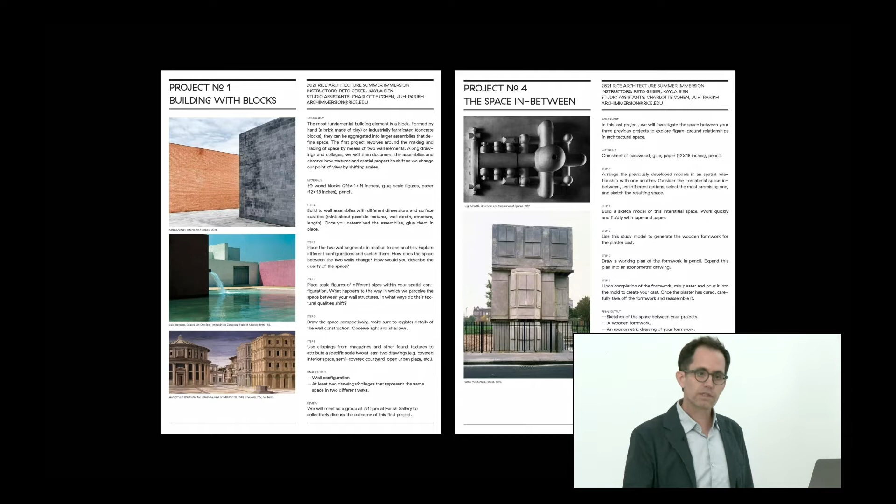The summer immersion is organized in a set of 4 assignments. We do one each day, and the last day we work on documentation. Each one is dedicated to one way of making space. There are clearly many more, but that's just a way in. The course takes place here in the school in an actual studio space, so the participants really get to experience what it means to be immersed in architecture school life.

They receive ample feedback, direct feedback, a lot of it directly from a group of our own students, grad and undergrad, who work as teaching assistants to provide important insight, not only on architecture, but also what it means to study architecture, what it means to apply to college. Important first-hand experience that comes directly from our students. And in return, I think this is also a valuable teaching opportunity for our students to get exposed to what it means to be on the other side in the classroom.

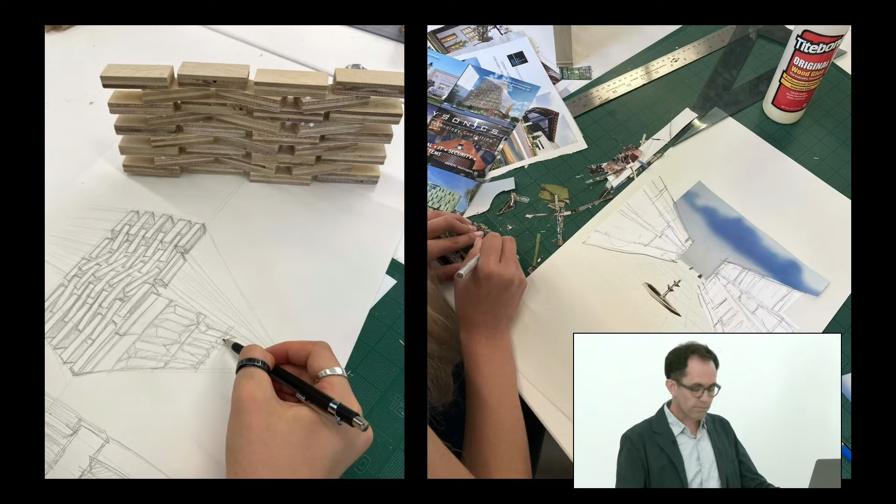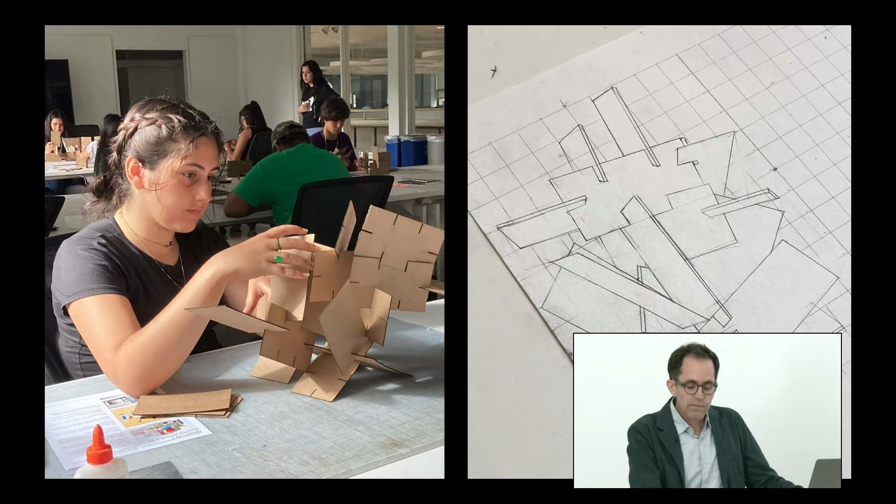We work with basic elements, building blocks that we aggregate into objects of various qualities set in relation, working with different scalar relationships. We work with plates and sticks. We explore different ways and means to create an envisioned space. As we move forward within these only 4 days, there's a progression of complexity. Many of the assignments are set up in a way that they're also open-ended, so students who are interested can continue working on them at a later stage.

But then throughout the week, we also have some fun. I mean, not that architecture isn't fun, but just kind of other fun. They get to experience college life, which is interesting too. Many of them at that point realize that Rice is actually an option for them. Many of them didn't even consider applying to the university.

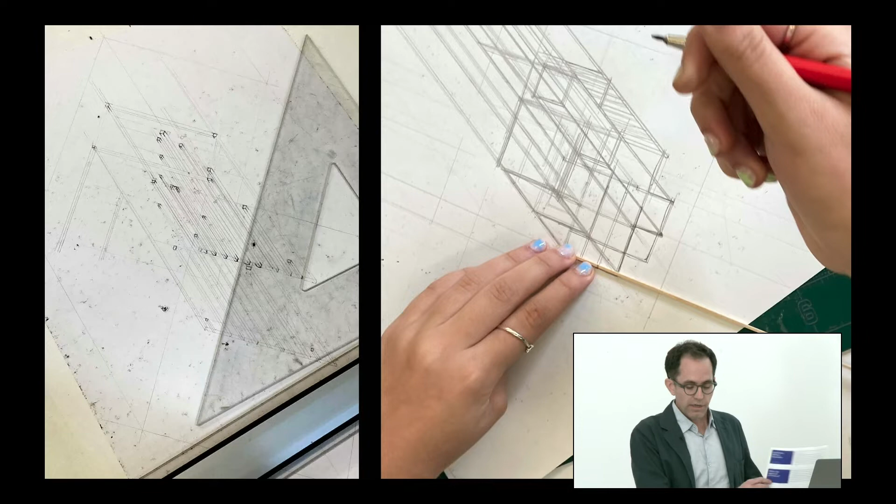And they quickly learn and progress, and draw things within days that are pretty amazing. Every once in a while we break out and do field trips. We visited construction sites conveniently on campus. We had presentations by the teaching team on their own projects, and evening lectures with colleagues from the school and practitioners from the city who talked about their work and experiences in architecture.

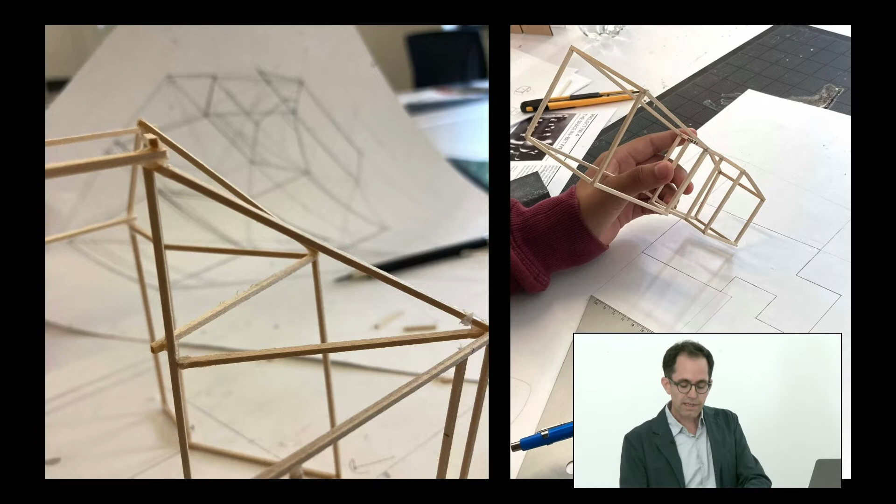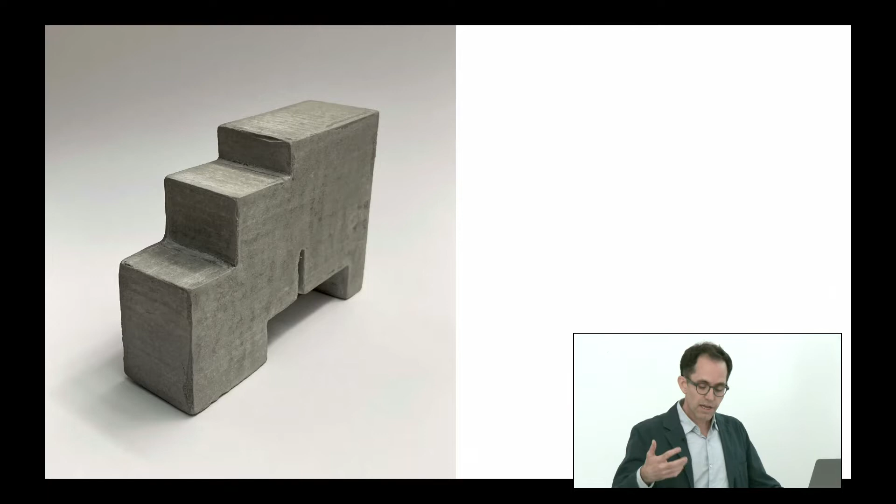And then we basically wrap up the week here with Paul Hester, focusing on documentation, showing them how they can document their work. That documentation is an equally important part of what they have to do. We also teach them how to make their work look good, not just with photographic equipment, but also with your cell phone and a piece of white paper.

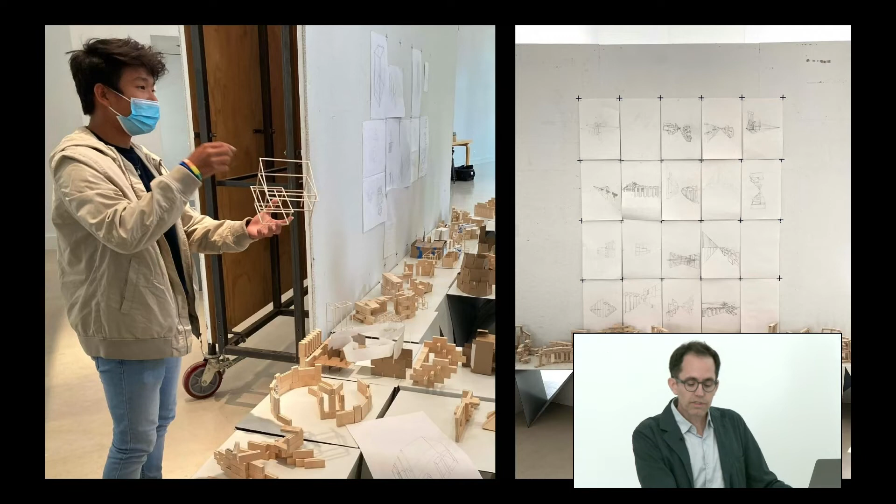So on a daily basis, the participants of the workshop had to present their work. That's an integral part — take pride in what they do, get comfortable speaking to others about their projects, learn to articulate ideas. It's really amazing to see how far they got in no time.

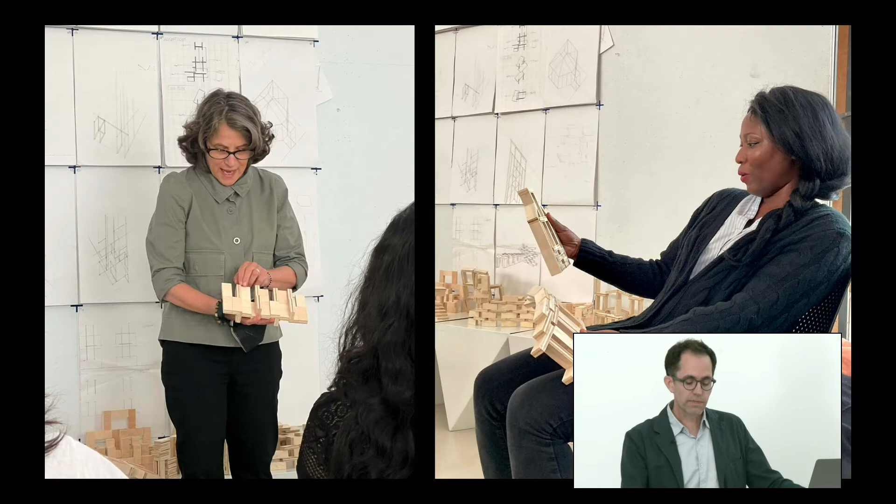And that culminates in a final presentation and celebration of the work, including a public presentation, also in front of an invited group of academics and practitioners friendly with the school, who provided really valuable feedback for the students.

So that's essentially how that week roughly works. I'll shift very quickly to two more things. This coming year we want to do some work looking into spatial reasoning. Essentially, spatial reasoning tests are used in engineering to assess prospective students' capacity to read, comprehend, visualize, and manipulate 2- and 3-dimensional shapes. This capacity is equally relevant in architecture, and for us the design portfolio is typically what we use to assess those qualifications.

There are several standardized tests, that's roughly what they look like, used in engineering schools across the country. Students typically have to take an entrance test; if they don't pass, they have to take additional classes, which tends to separate out and discriminate a particular set of students yet again.

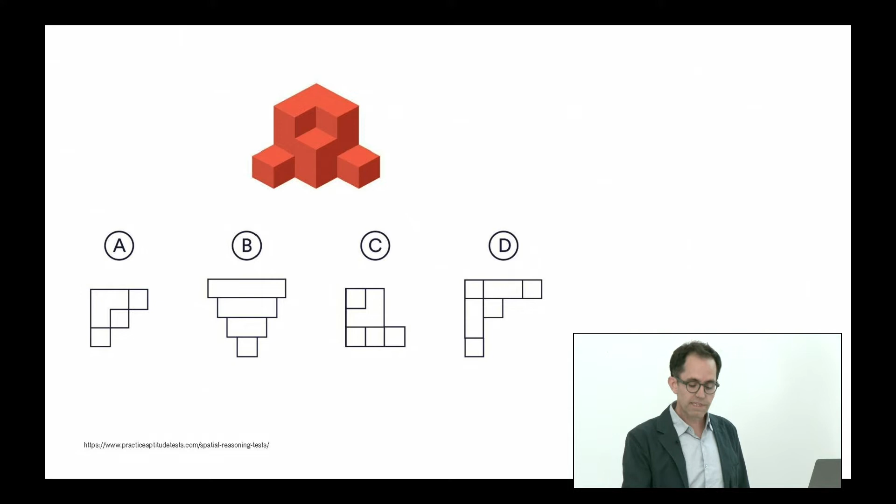So what we will do next summer is basically test our summer immersion participants as they're coming in, to see what kind of progress they made and how they perform at the end. We're particularly interested in how the pedagogy of our program compares to the standardized, far less hands-on, and far less fun modules currently used in other fields. We also hope to learn more about the reliability of such assessment for our own disciplinary purposes.

The other thing we're also starting in the spring is a set of teacher workshops, because there are only so many students we can reach with the summer program. Despite generous support, there are limitations to what we can accomplish in this context. In order to expand the effort, we decided it would be best to find ways to reach students in their own schools, to cut transportation challenges and have broader impact, and to improve architectural literacy among high school students more broadly.

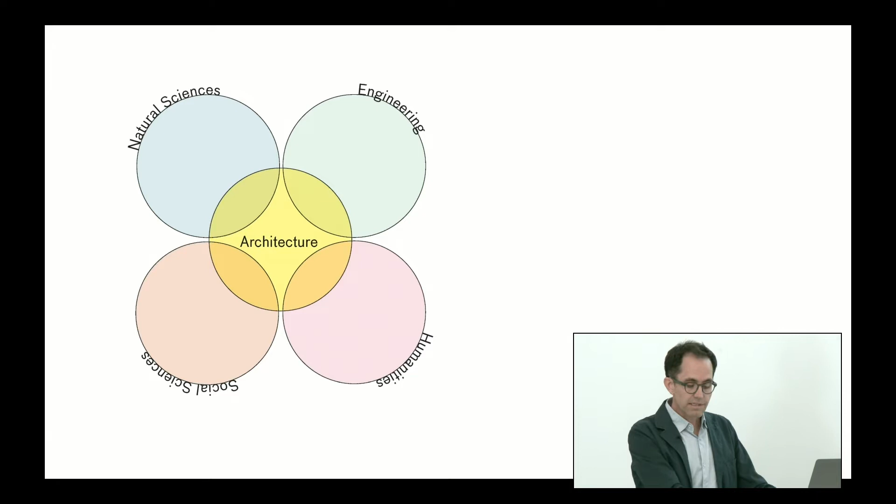The challenge is that in many schools here, there are hardly any art classes. Texas is incredibly STEM-driven, and one of the beautiful things about architecture is that we connect to all these different other areas and fields. So the goal really is to use STEM courses as our Trojan horse to enter that part and bring design thinking into the high schools where we normally wouldn't have easy access. We'll see where that leads, but the hope is to have a broader, bigger impact through that.

So as I said in the beginning, those are small steps. It's a beginning, but I'm hopeful that we can further build this, and that the related research, teaching, and outreach initiatives will yield some fruits, hopefully.

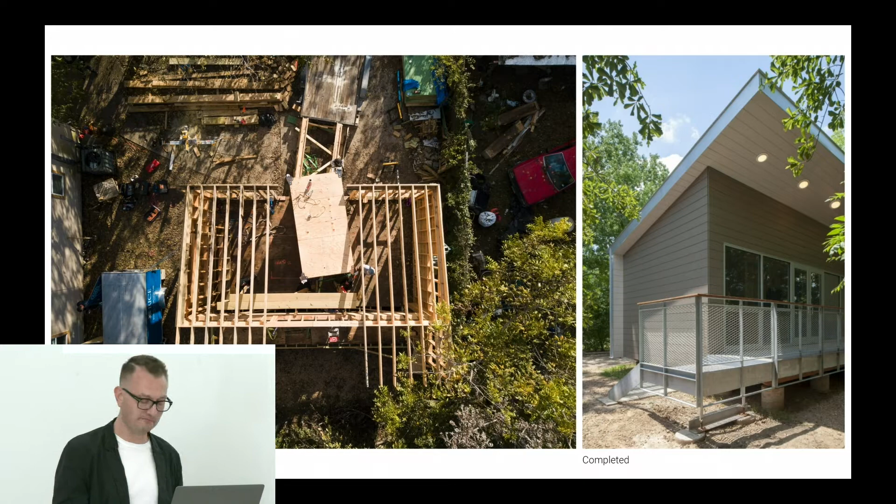Five years ago, Construct completed its first accessory dwelling unit, a single 360 square foot dwelling for two separate people. The project was prompted by the need for a local organization to house two counselors next door to an at-risk youth program. For those who don't know, an accessory dwelling unit, or ADU, is simply a second home built on the same lot as a single-family house.

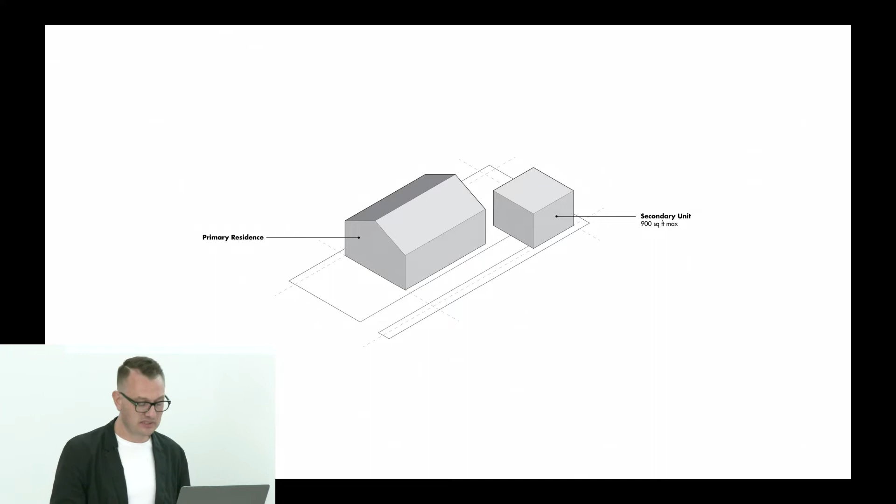This type of housing was outlawed in many U.S. cities during the 20th century, but ADUs have always been permissible in Houston. Building on the success of Plus House, we began a new phase of research focused on the ADU. At that time, ADUs were just starting to attract attention. Portland had recently made them legal, and California was in the process of trying to enact similar statewide legislation, which passed in 2019. Many cities in the US have now repealed bans and are even incentivizing ADU development. These efforts, of course, are in response to the compounding and interrelated crises of housing and climate.

Accessory dwellings, by their very nature, may seem inconsequential, but consider a simple thought exercise. The Houston metro area is comprised of over 1.5 million single-family homes, of which just over 5,000 are thought to have an accessory dwelling. Building an ADU alongside each home could house well over 2 million people and accommodate Houston's expected population growth through 2030, all without a single new road or greenfield site.

Of course, to do so may double down on some of Houston's long-standing ecological and social problems. So our aim has been to demonstrate what kind of ADU we might build and how we might do so more thoughtfully. We've now completed a series of 5 research projects, each beginning by asking students to design a prototype that addressed the unique challenges and potentials of the ADU within a particular thematic. The auxiliary project, for instance, that just concluded and that I'll share with you today, looked to create an ADU that was net positive in energy use.

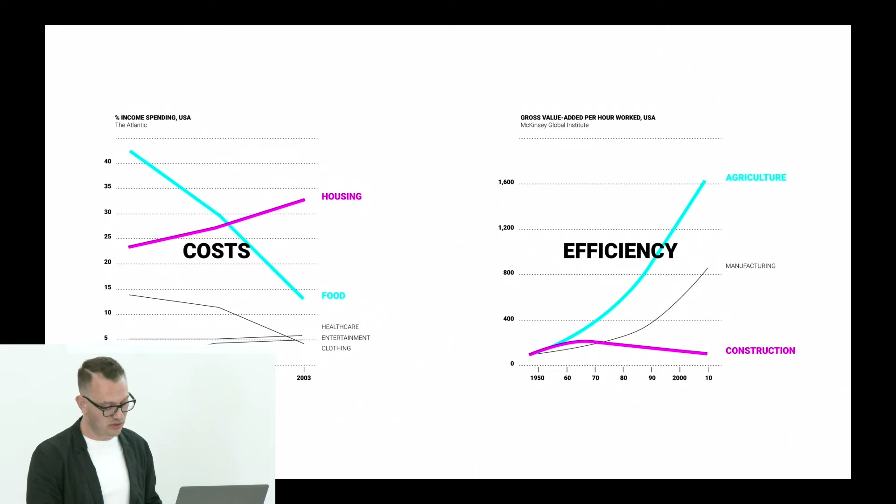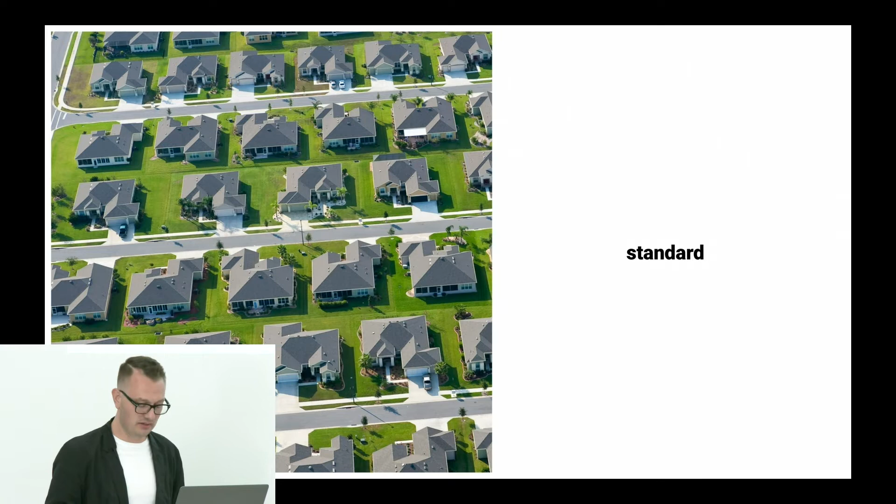While each project incorporates matters of sustainability, they also look for new ways to build affordably. And though there are many contributing factors to the persistent rise in housing costs, we focus on the uncomfortable reality that construction efficiency in terms of labor peaked 60 years ago. Perhaps that shouldn't be all that surprising, as our model for housing production hasn't changed either, with the vast majority of U.S. housing relying on the serial production of low-density, repeated designs built upon undeveloped land—industrially produced in some regard, but ultimately each still constructed by hand.

The ADU poses a more sustainable alternative to infill housing within the existing urban fabric. But it must contend with the reality of existing site conditions, backyards with very real limits on what we can build, and conditions that increase the need for a custom solution, increasing costs in tandem.

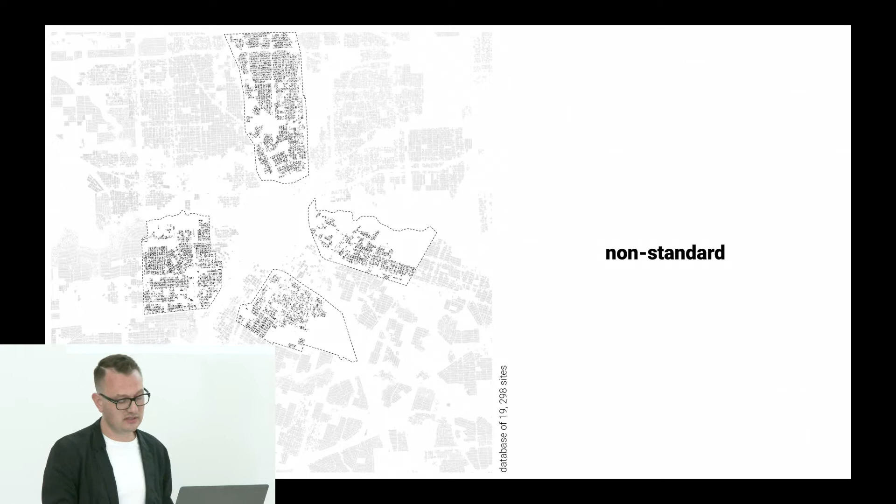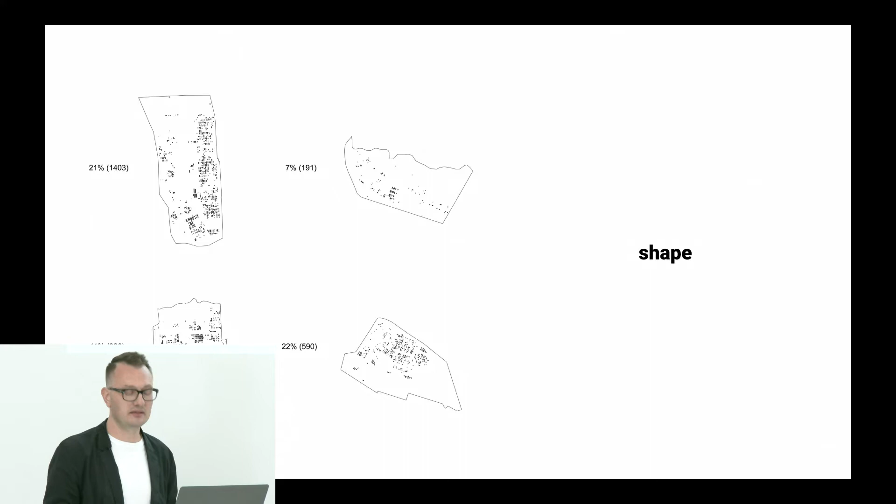The auxiliary project, for instance, looked at 19,000 single-family lots comprising 4 central Houston neighborhoods, less than 20% of which, in the students' analysis, actually met the often-cited development standard in Houston of 50 by 100 feet. By analyzing specific sites in aggregate, we can better target the reality of real-world conditions, designing an adaptable type of dwelling rather than one idealized to meet an assumed standard.

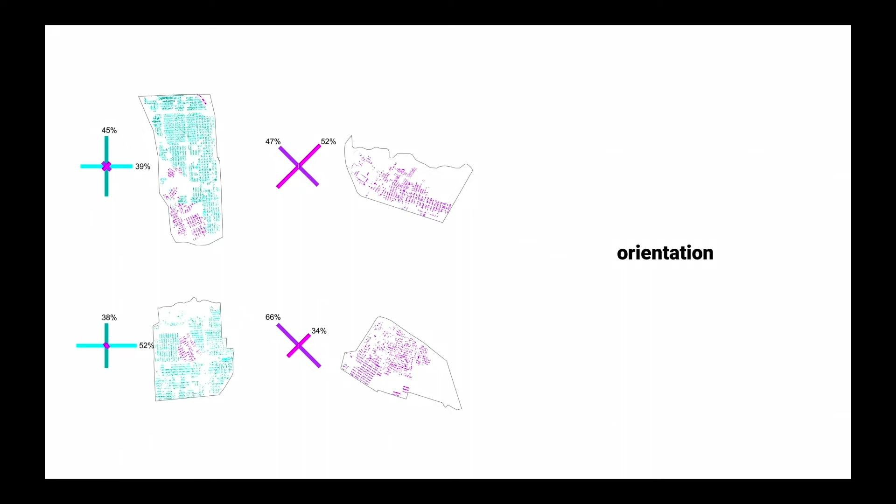Doing so increases viability, but can also improve performance. Solar energy production, for instance, is highly dependent upon site orientation, which in turn varies significantly across even this small sample set. To address these broad concerns, each project investigates computational strategies at the urban scale to analyze and test prospective ADU designs, and does the same at the building system scale to utilize computer-controlled fabrication and assembly processes that permit efficient methods of non-standard production.

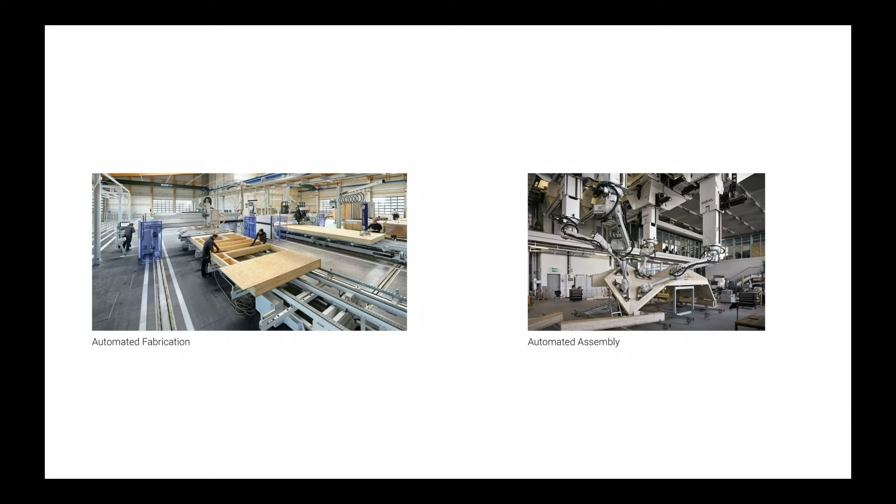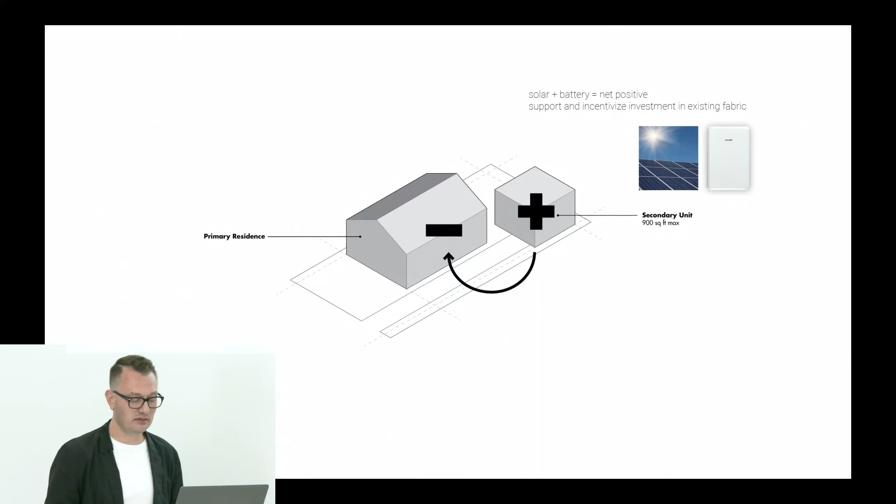To put that in context, the auxiliary project, which began in 2019, looked to examine the ADU's unique potential for sustainable energy production and use. The project's basic concept was straightforward: to build a prototype net positive ADU. Along with minimizing energy use, we would pair solar generation and battery storage. In principle, any extra power generated could then subsidize the primary dwelling.

In this project, for instance, a group of students proposed a triangular ADU, efficiently inhabiting the rear corner of the site with entries to the driveway and side yard, and with an angled wall fronting the primary dwelling for privacy. They then built a parametric model, testing, iterating, and refining the type to maximize its viability and automate its design application across all 19,000 sites.

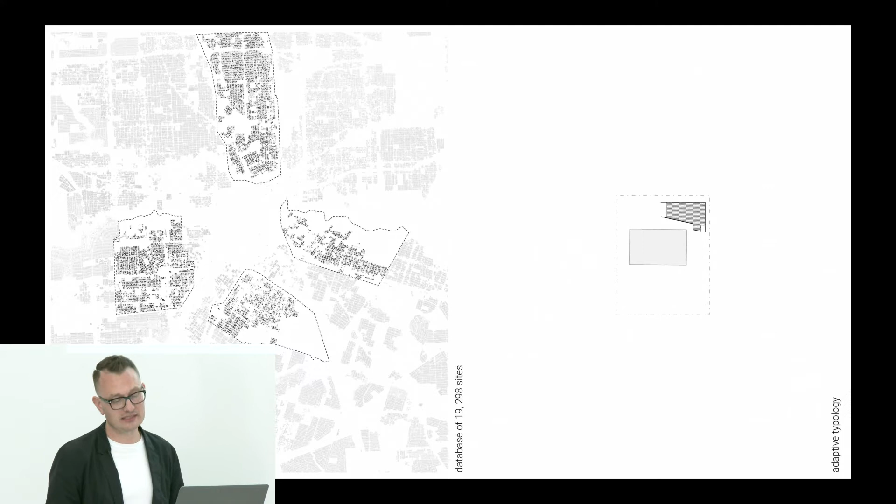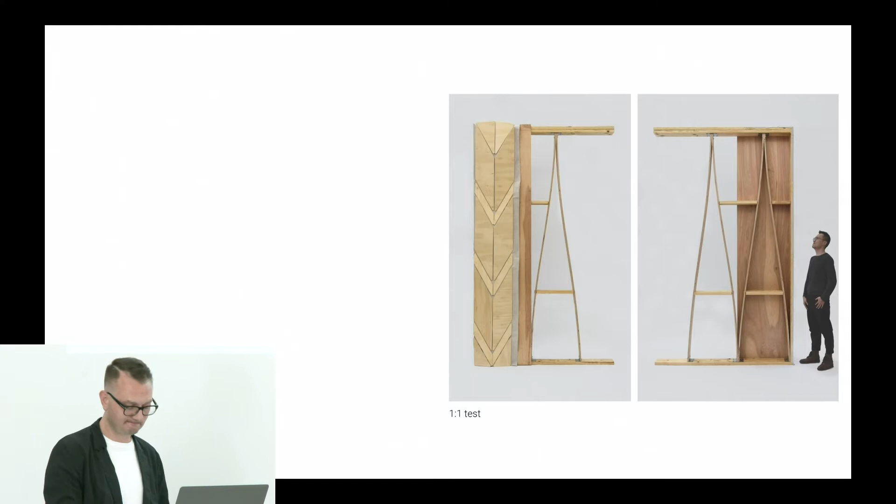In parallel, the group proposed a novel means of wall construction, an accordion-like system of stretched studs that could be deployed at variable lengths, and a faceted self-shading system of cladding culminating in a full-scale mock-up of the system. They produced a thermal analysis of their proposal and incorporated it into a full energy model of their project. Students in 3 other groups completed a similar process, and the results of their energy models were compared.

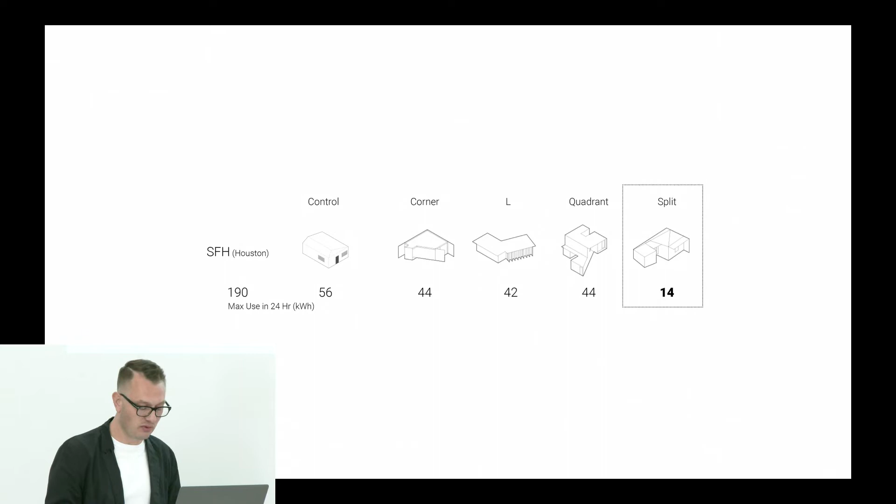While all outperformed the control, one project was predicted to use 75% less energy and was selected to advance. The project made use of a form similar to that of a well-known historical type, a dog trot, which separates interior spaces with an exterior porch through the depth of the house to maximize passive ventilation.

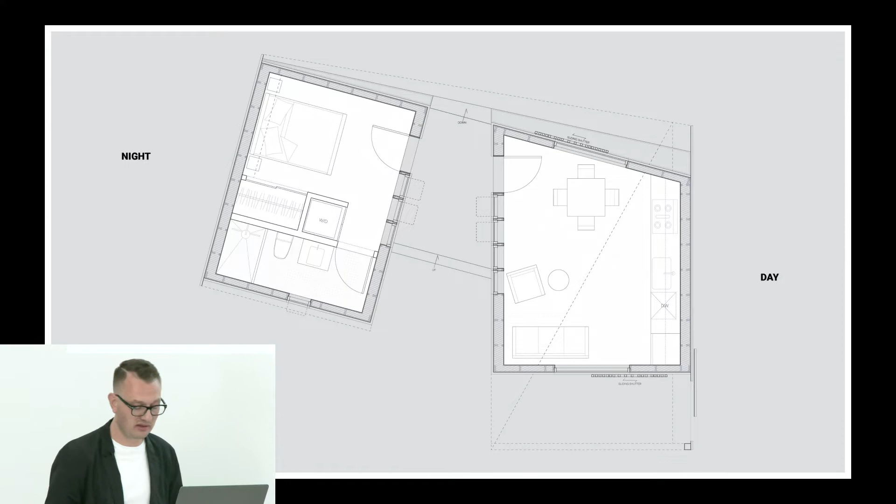While the internalized porch functions similarly in the student's project, more importantly, it separates day and night functions into separately conditioned volumes, living, kitchen, and dining in one half and bed and bath in the other. The approach allows the conditioning of the 2 volumes to vary, tailored to occupant use. While the inhabitant is asleep, for instance, the kitchen volume can be conditioned for optimal overall energy use rather than human comfort. This logic extended to variations of the type.

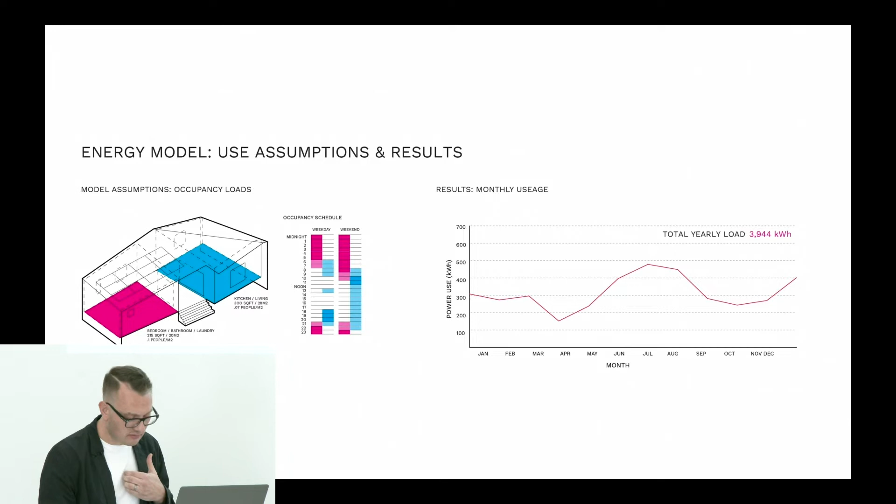Sorry, got off one there.

This approach allows the conditioning of the 2 volumes to vary, tailored to occupant use. And the logic extended to variations of the type, a work-live separation, for instance, rather than day-night. And again, it was optimized across the range of potential sites.

And concluded by linking the energy model and urban analysis together to understand the scale of impact such a project might achieve.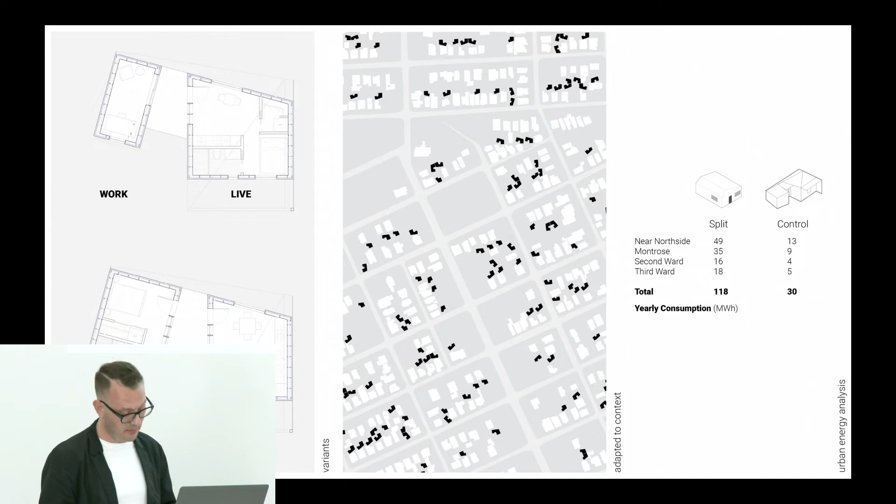Alongside the project's unique spatial configuration, the students developed a portal frame system that integrated standard lumber with CNC-cut plywood plates. The approach creates a double stud and rafter system, more materially efficient in structure and more insulative, while aiming to shorten on-site framing and ease assembly of more variable, solar-optimized roof angles.

With concept in hand, we engaged Avenue CDC, a local nonprofit that provides affordable housing, with an offer to partner and realize a demonstration project. Avenue's proposed site at the bottom left included 2 bungalows and an existing ADU from the 1930s, all historically protected buildings and affordable rentals.

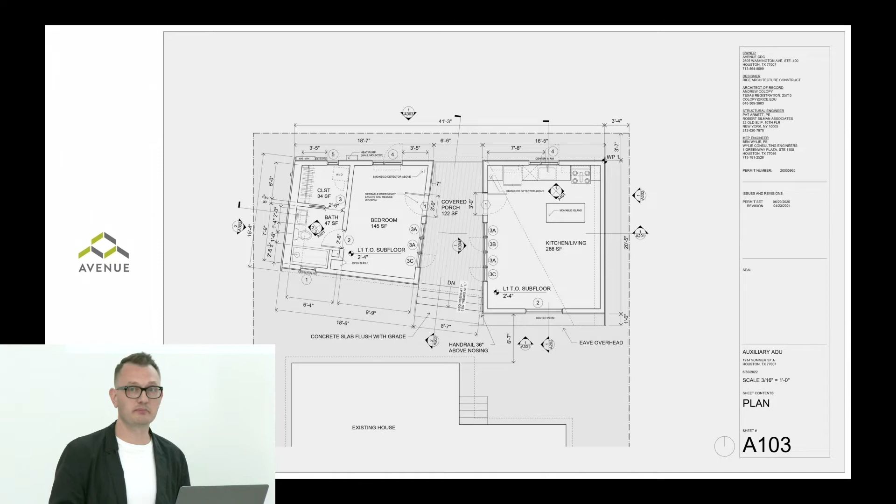After a semester with students developing construction drawings and a summer spent permitting the project, construction with students began in the fall of 2020, with work beginning on campus at the onset of the pandemic. That fall, a group of a dozen students worked to complete foundations and framing.

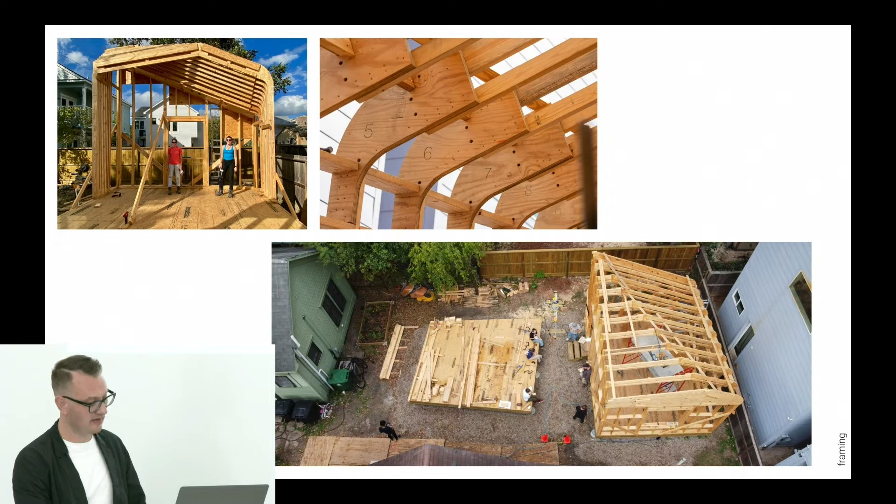Here at the top, you can see one completed set of portal frames, including the CNC plywood connections, and at the bottom, the two principal volumes underway.

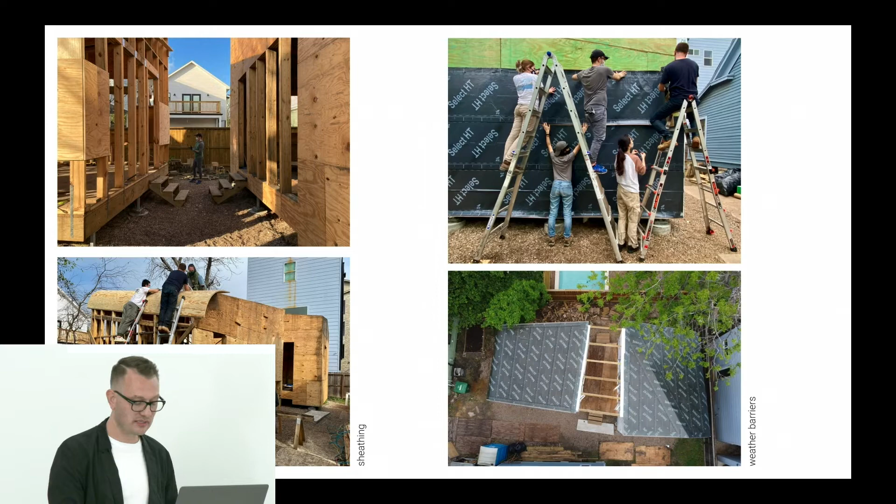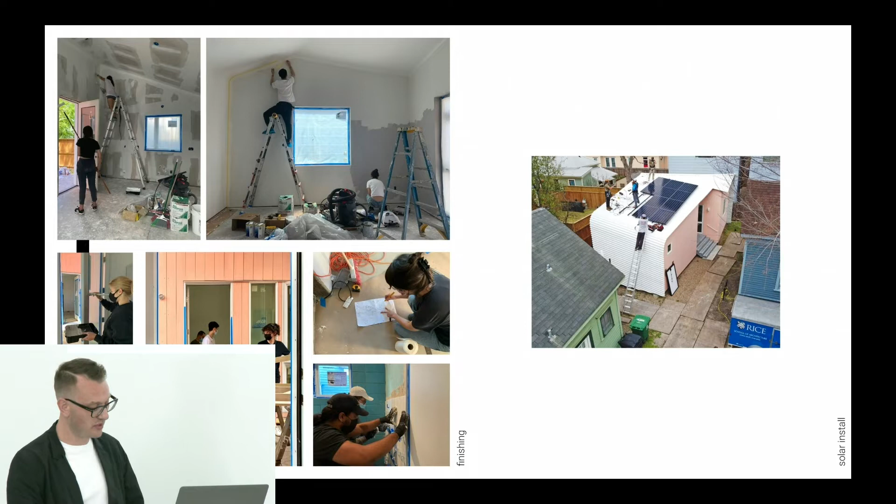Sheathing, installation of weather barriers, windows, and doors continued into the next spring with a new group of students. Roofing and cladding was completed mostly over the following summer. A portion of the MEP work and the solar and battery systems were completed by contractors, but the vast majority was completed by students, along with myself and my co-director, Danny Samuels. Last fall, a final group of students completed the interior finishes, painting, caulking, tiling, and the project wrapped up with an opening this past spring.

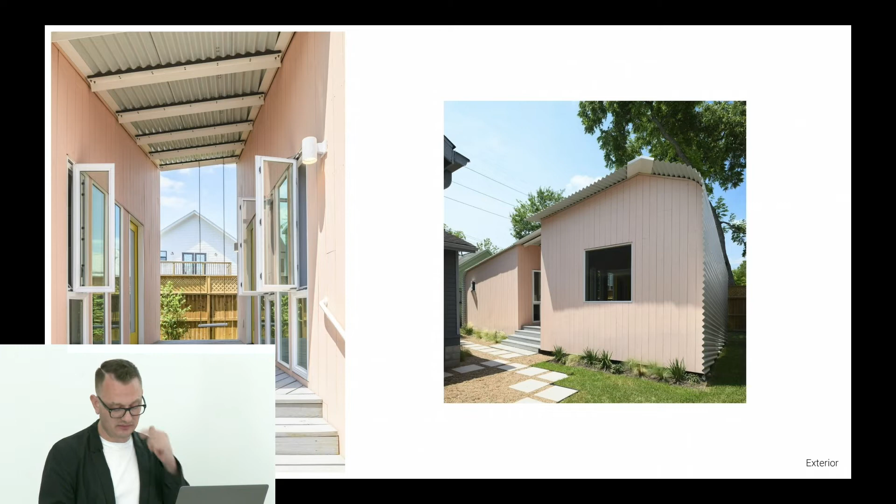While the net positive energy aspect receives the most attention, it's important to note that it's not the most significant benefit of the strategy, because few things are less sustainable than the common practice of demolishing a single-family home and replacing it in kind. Building a new house to replace an old one, even if it were net positive, can take decades to offset the embodied carbon lost from the original.

This is just one important takeaway, and one that highlights a fundamental aspect of ADUs. The vast majority are additions to existing homes. In this way, ADUs are best understood as a form of urban renovation, a means to augment the urban environment toward greater resiliency, and often with a lower environmental and economic cost than wholesale replacement.

In all, 63 students worked on the project over the course of 5 semesters and 2 summers. Today, it provides a home rented at 80% AMI, and we've made arrangements to track the energy usage to evaluate its performance for future research.

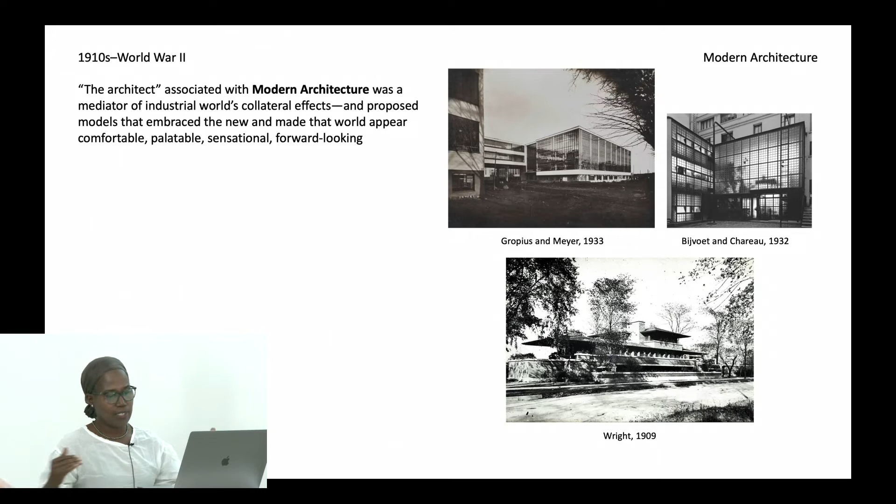The role of the architect in those examples was essentially as a kind of mediator between material logics and realities and the modes of production that were becoming typical of industrialization, the use of the machine, and so forth. So we got these beautiful projects like the work of Chareau, the Maison de Verre in Paris, or the Bauhaus School with its wall of glass, or here in the US, Frank Lloyd Wright, here the Robie House with its dramatic interior organization, which you don't really see here, but it's breaking from the traditional norms of the forms of buildings.

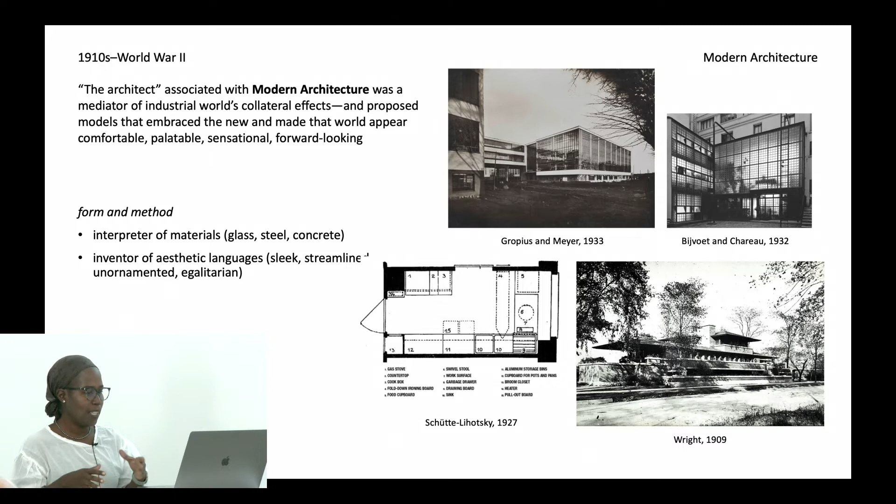So there's an aspect to modern architecture that involved a sort of method of design, thinking about function, for example, as a starting point rather than starting with typical forms and shapes and symbols, and inventing ways of using these materials that constituted their own aesthetic languages that began to make sense even though they were new, or space planning, as in the case of Margarete Schütte-Lihotzky.

But at the same time, modern architecture was associated with a certain ethical attitude in which the architect often concerned himself or herself with the status of the worker, the kinds of dwellings that workers in European cities were typically offered. Architects like Ernst May, working with Schütte-Lihotzky, who designed the kitchens, designed housing blocks that gave, with an efficiency of space, housing to large numbers of people, affording them a place to sit outside in the sun. So they weren't just workers going to the factory and sleeping, but had a kind of life where they could take advantage of some of the goods of this new mechanized world, just like everybody else.

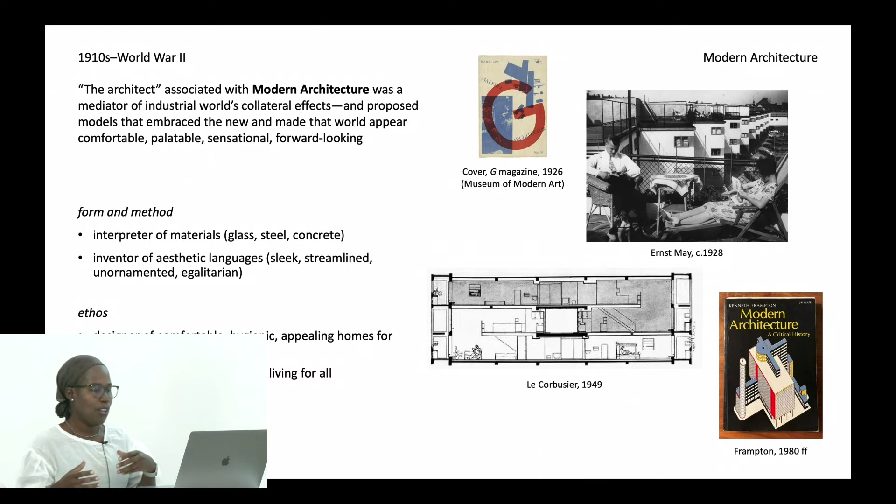Also the avant-garde movements, such as the one that Mies van der Rohe was involved in—he's associated with the magazine which I show here—or Le Corbusier's, as in the l'Unité d'Habitation, this design for apartments that could house a large number of people, taking advantage of efficiency, but also presenting a new aesthetic.

So after World War II, there was a kind of break in production in Europe, and at the same time, when the economies began to recover, when architects went back to work, there was no longer such a pressing need to prove modern aesthetics in most places. So you had this output of modern buildings. This style that had been a kind of avant-garde project before the war was suddenly, or finally, the norm. It was even aspirational and became the basic template for shopping malls, commercial spaces, institutions, and homes as well.

So what had happened to the ethos of solidarity with the less fortunate, of trying to distribute the goods of industrial life to everybody? Architects and critics of architecture began to ask this question about this kind of production, which tended to result in these large projects, and not so much push forward that research that had been begun before the war.

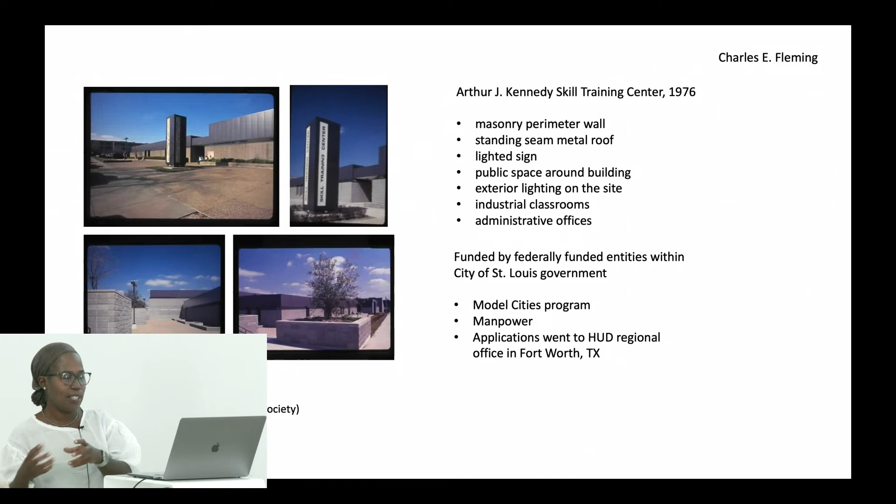So it's very much within the kind of modern material language—these masonry walls and standing seam metal roof. There's also a story behind that, because Fleming was only able to work with certain contractors, as white contractors wouldn't work for him as subcontractors. So he worked with black contractors who he often had to teach how to do the details he wanted. It was a very collaborative process for him.

But my point here is that it's a modern building. He's doing, in a sense, an earnest form of modern architecture, and it's set up in such a way that it reconfigures, in a sense, the distribution of labor and capacity around him.

It was closed in 1984 when the federal funds ran out. By that time, it was a very much loved local institution. Thousands of students had gone through it and gone on to get jobs.

And in fact, when it was torn down some years after, in the 1990s, the local alderman and an activist staged a symbolic protest that got them into the paper. I show that just to show how this work, which came out of the imagination of the architect in the context in which he made it, became cherished by the public.

So I'm reflecting on how it may constitute a kind of successful model of modern practice in his time and in his place. Thank you.

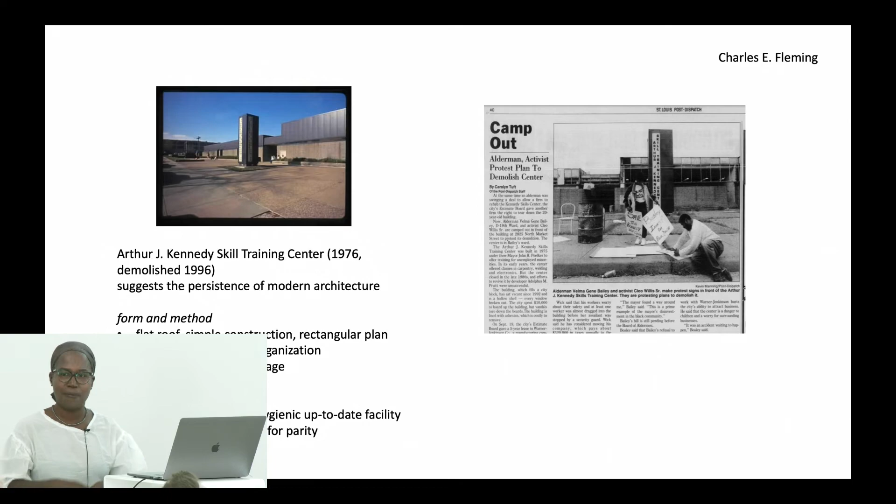Thank you, Reto, Andrew, and Shantel. Shantel in particular, I think the discussion of Charles Fleming is a perfect segue to a snapshot of my own research, which I'll present briefly on the work of architect Bertrand Goldberg and his iconic Marina City project in Chicago, which has many parallels to what Shantel was just presenting. It's a collaborative project I worked on with a dear friend and colleague, Katerina Ruedi Ray, that resulted in a monograph that was published on the project.

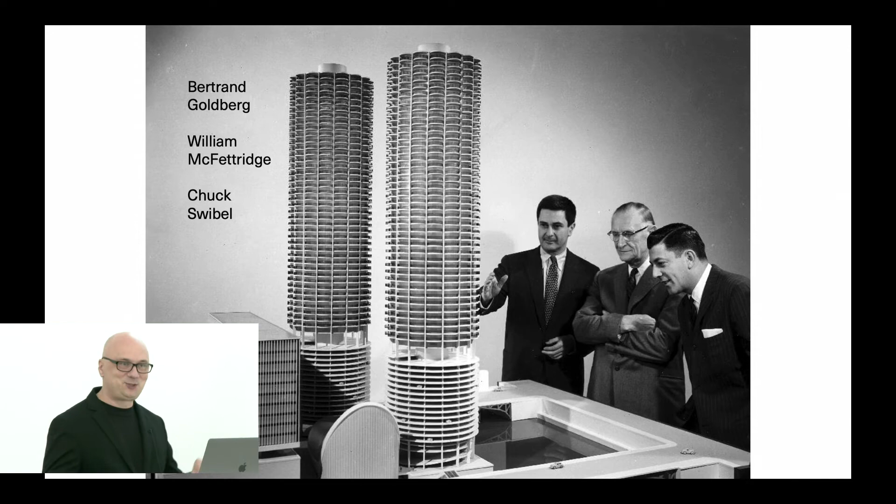Chuck Swibel on the right is more optimistic. He's actually a realtor, so obviously he's trying to make a deal and creating a particular atmosphere here.

In the book, Katerina and I discuss how, as an architect, Goldberg had to bring a series of skills to a project like this—to work innovatively with form and structure, and with finance as well, kind of like Fleming, to understand trade unions and the flows of capitalism at that time, and to work not only with Swibel and McFetridge in the middle, but also Mayor Richard Daley on the left.

We love this image with Swibel patting Mayor Daley on his cheek as they try to envision this new project during the groundbreaking ceremony.

But McFetridge, as president of the janitors union, really summed it up nicely why they built the project: "If we can't make jobs any other way, we will build buildings to put our men into." Basically, at a time when everybody was fleeing to the suburbs for housing and office space, they decided to build this project as a way to put janitors to work.

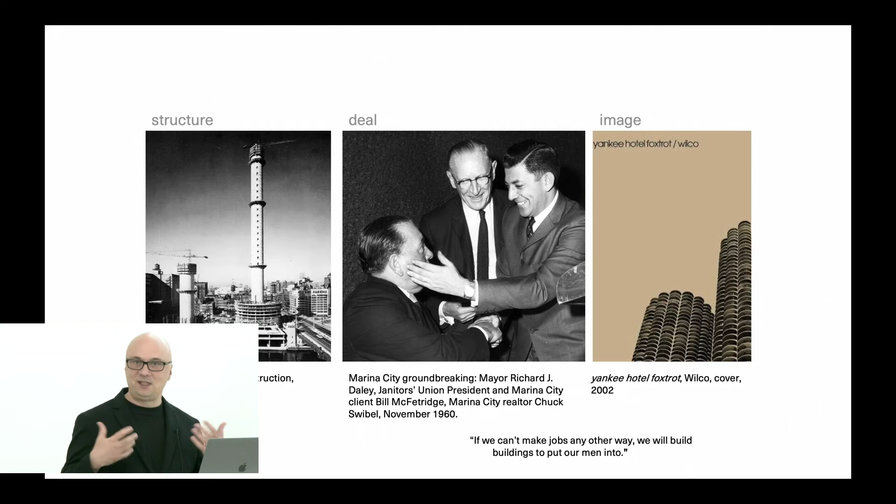Goldberg, as an architect, understood that context, and also understood the importance of drawings and images to pitch this project to the public as a real project of change. He even went to the FHA in DC to present this project to garner additional federal funding.

Interestingly enough, he didn't present two circular towers. He presented a very conventional rectangular tower because he didn't want to risk any confrontation with the federal government.

But in order to gain the funding, Goldberg, McFetridge, and Swibel had to work to reclassify single people and families without children as families eligible for FHA mortgages, because otherwise they wouldn't be eligible—the funding model was for a traditional family in the suburbs. This kind of building had a high-density structure with a lot of efficiencies, studios, and one-bedroom apartments. They also had to work to change the zoning laws.

Oftentimes in Houston, we lament the lack of zoning and the urbanism it results in. But sometimes zoning creates its own problems too. In particular, in the 60s the zoning laws in downtown Chicago wouldn't allow for any kind of mixed-use development.

So basically they had to reclassify a single block into a district to do that. The project was built between 1959 and 1964, and really, when you look at it here, it's on that edge, north edge of downtown Chicago before you get to River North and the Near North Side, which is mostly the warehouse district.

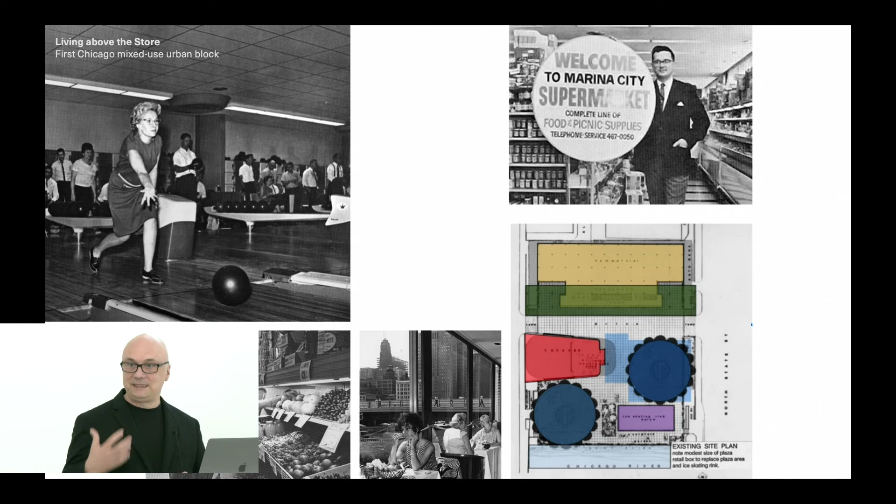It was first, and for a long time, the only housing project in the city of that kind—not public housing, but a mixed housing project that really sparked the renaissance of downtown Chicago. I won't go into many details, but I want to highlight that Goldberg, as an architect, advocated for living above the store, and argued that for the project to have longevity, it had to be mixed use, providing amenities for residents to really stay there long term.

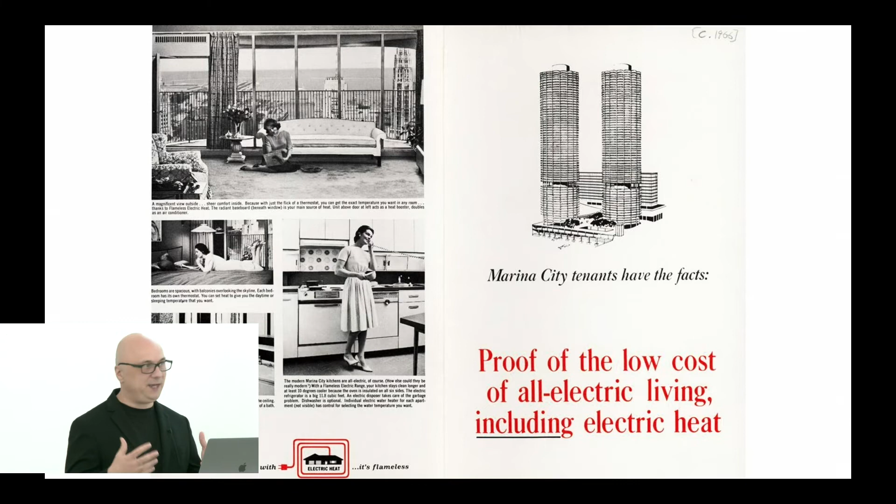At the same time, in this kind of space-age competition, he also argued that the project needed to be what we'd call today sustainable and resilient—using electrical energy rather than other types of energy—to make a more energy efficient and affordable system of apartments.

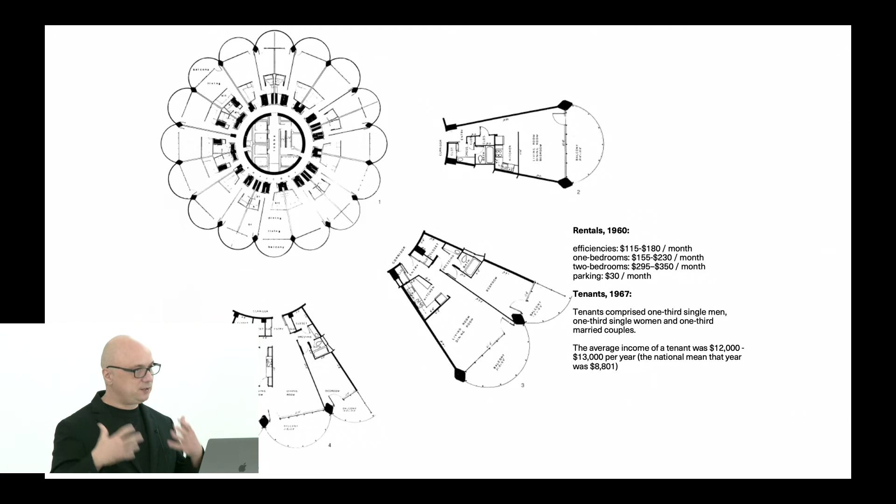There's a whole number of savings achieved by the circular plan in terms of structure and the central core, also eliminating some exterior walls, resulting in more efficient energy conservation inside the building, as opposed to energy loss, which is a big issue in Chicago.

But what Goldberg really brought to the table was not only the understanding of energy, construction, economy, and investment, but also design skills—the sort of beauty and quality of drawing and bookmaking—to convince the public of the merits of this kind of project.

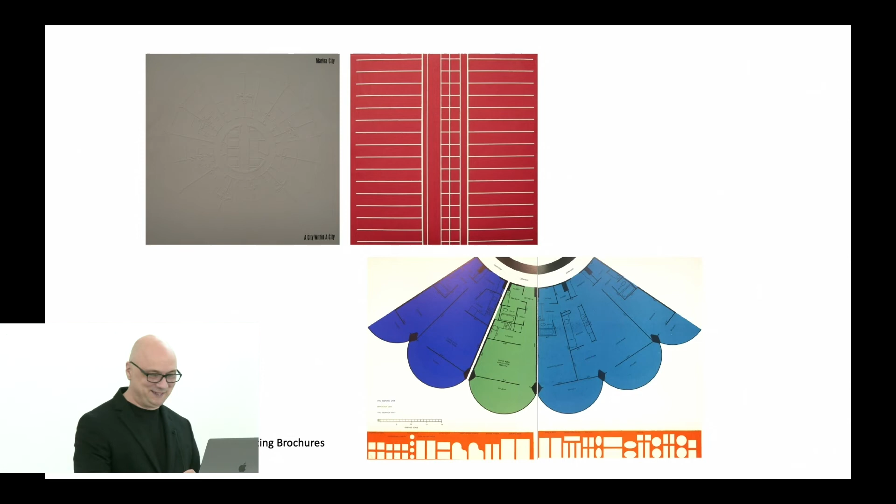Before the project was even built, at the headquarters of the Janitors Union in Chicago, Goldberg built a very interesting full-scale mock-up of one of the apartments, trying to convince not only the janitors but the public of the beauty of urban living.

Because the hardest issue here was not only financial, but convincing people that they should stay in the city and that urban living is not only dignified but beautiful. So they built this full-scale mock-up so people could enjoy the view one would have from the imaginary, I believe, 40th floor of Marina City.

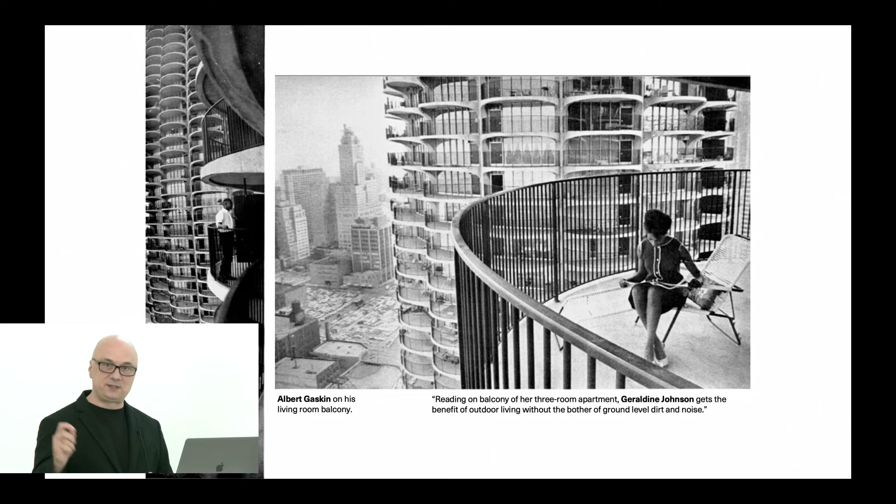The November 1964 issue of Ebony magazine had a wonderful feature on six African American residents in the complex, telling the stories of why they liked living in Marina City and the kind of self-expression it allowed—including Miss Johnson, a librarian and teacher who loves to dance, with the balcony allowing for that, and relaxing views experienced on the roof deck.

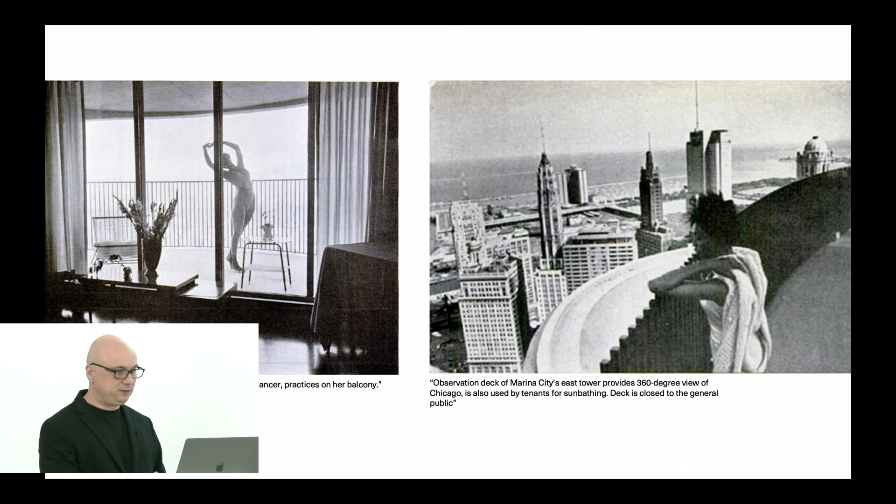Albert Gaskin was denied tenancy, particularly on the north side, which is where he wanted to live, and in Evanston, and then eventually settled in an apartment in Marina City. The issue of Ebony magazine documents his own experience, not only in the apartment, but also in the mixed-use elements of the complex, particularly the restaurant and so on.

But this idea that there is something really beautiful or inherently beautiful about urban living, about density, is something that Goldberg as architect and Goldberg and Associates tried to pitch more broadly—the idea of getting together not only in the mixed-use spaces of the restaurant or the marina itself, but also on one's own balconies.

The balconies allow the space for gatherings and interaction. In many ways, this idea of gathering, urbanity, balconies, the views is what really gave the longevity to the project, and to this day it's a popular place to live.

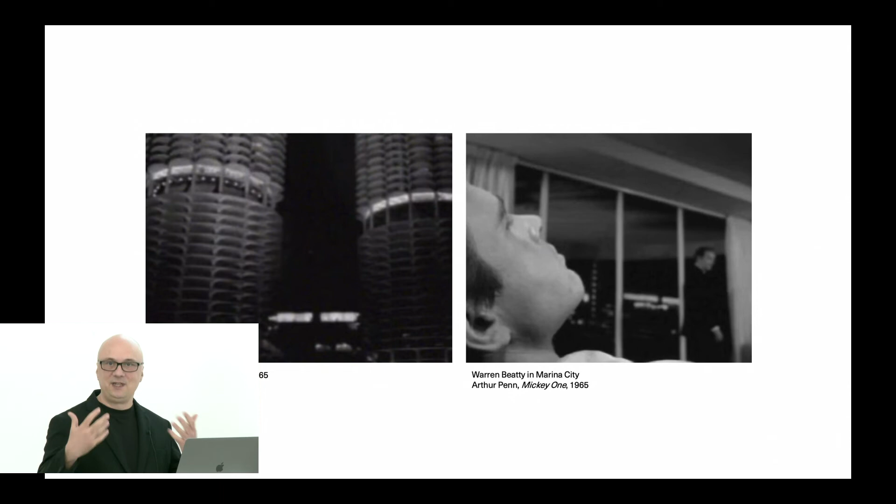It is also what gave it a particular presence in popular culture. I know, Carlos, you love movies, and this is one of those buildings that kept recurring in many films, including Mickey One by Arthur Penn with Warren Beatty, where there's a whole number of scenes filmed in Marina City and the kind of nighttime or daytime effects that the building provides. And of course, once it made the cover of National Geographic, it became a popular icon, or the Jetsons for that matter.

But really, as an architect, Goldberg worked very hard to implement and imprint images, particularly beautiful views from the balconies, into popular consciousness. He hired some of the most famous photographers of the time, including the Hedrich Blessing firm, that documented every step of the way as the building was actually being built.

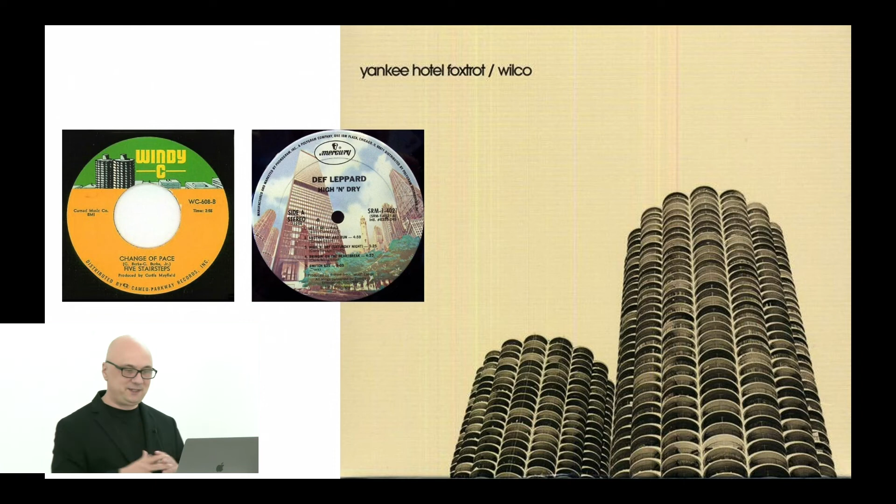And again, those kinds of things linger until today—or sort of today, because this is now almost 20 years ago. Marina City keeps reoccurring as an icon of urbanity, not only in the city of Chicago, but also more broadly. But I would say it's those skills of the architect to draw, to visualize, to make form, but to understand how that form sits in the larger context, that gave the project that kind of longevity.

In closing, I would say many of those things come from education—they don't come in a vacuum. Goldberg was actually a student at the Bauhaus between 1932 and 1933, and for those of you historians in the room, that was the final year of the Bauhaus. He took, so to speak, the last train from Berlin as Hitler was seizing power, escaping to Paris and then back to the U.S.

In addition to that, he was an avid reader. 1932-33 was a tumultuous year in Germany as Hitler was seizing power. One of the key guest speakers at the Bauhaus was a person called Vladimir Woytinsky, who was actually the president of the Association of German Labor Unions. He came to speak often about his experience with both labor unions and trade unions in Germany, and his earlier experience during the Russian Revolution.

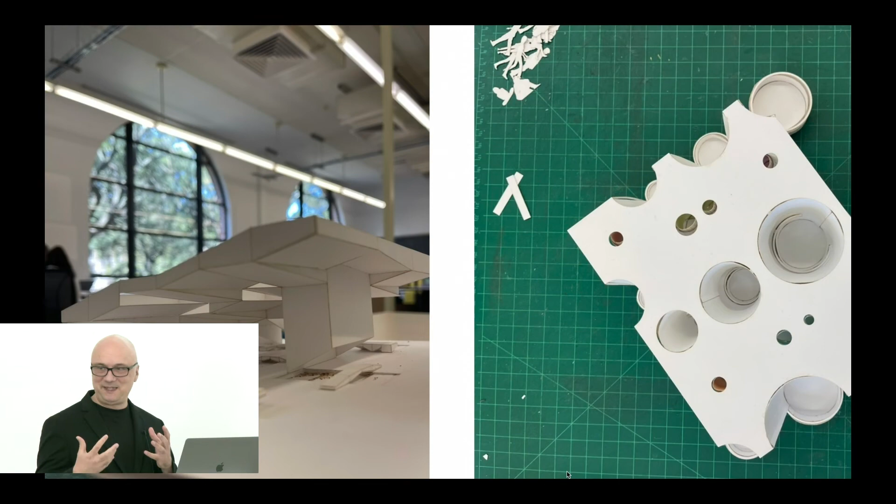These are just some snapshots from our studios in the last couple of days. Dawn, these are your students in the introductory graduate studios. I like these images because they show the work in progress. I hope you don't mind me showing work that's not fully cooked yet, but it does look beautiful, and it shows images of people and scale figures as we try to understand how the spaces we design, even on a small scale, impact the scale and experience of people.